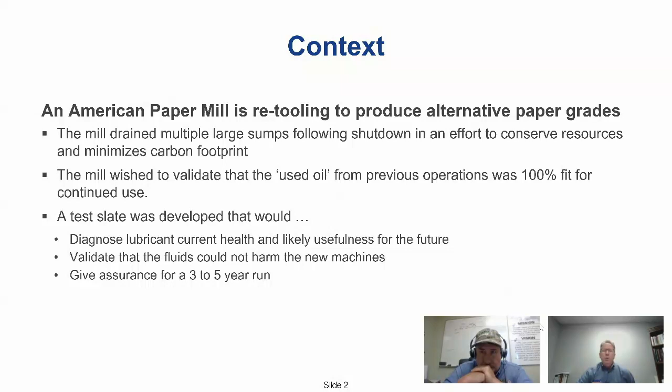With that in mind, we developed a test slate that would give us the means to diagnose the current health and likely future usefulness of the fluid, to validate that the fluids could not cause harm to the machines if they were set in for a 3 to 5 year run, and then to give the customer some assurance that if they do go ahead and start the mill back up with the fluids from the previously operated machinery, they were going to be in good shape.

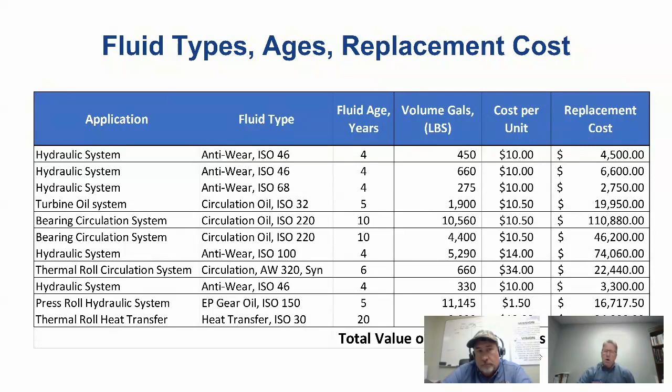So here's a representation of the different classes of fluid. The applications were hydraulic, turbine, circulating systems, and thermal control, and component wear protection. Fluid types are identified here generically. The age of the fluid: in all instances, the oil's gotten some long-term use. So they've gotten their value out of it. The question is, is there more value to be had? You notice in the bottom right, $331,397.50. It's the replacement cost for the fluids if we determine that the fluids are not suitable for future use.

So, step-by-step process here. First, we reviewed the data history of all of the fluids, all the applications, took a look back in the past to see what was going on. And then we constructed a test slate that consisted of the routine tests repeated, since the oil's been sitting still for more than a year, I guess about 18 months, and secondary and tertiary testing to measure for remaining antioxidants and any potential varnish or sludge risk. And then following all the testing, we were to make decisions on replacement requirements.

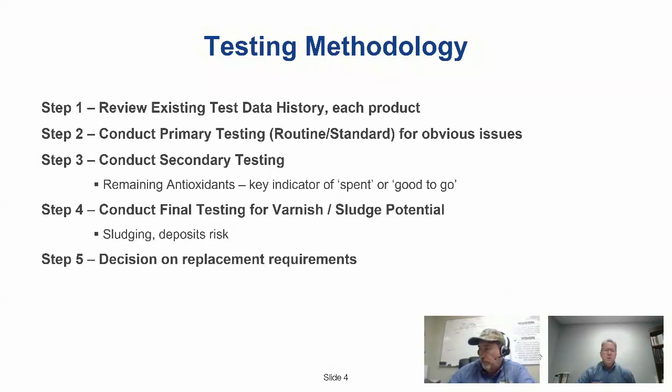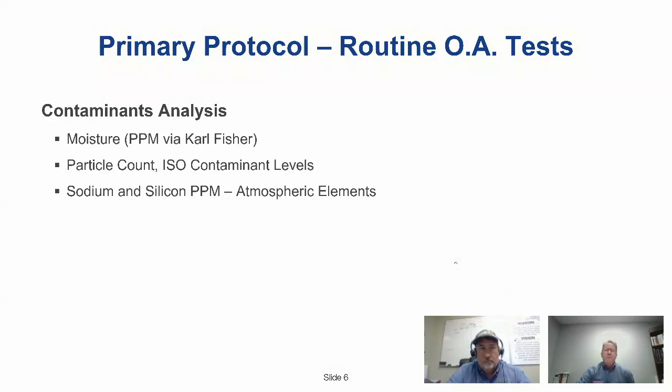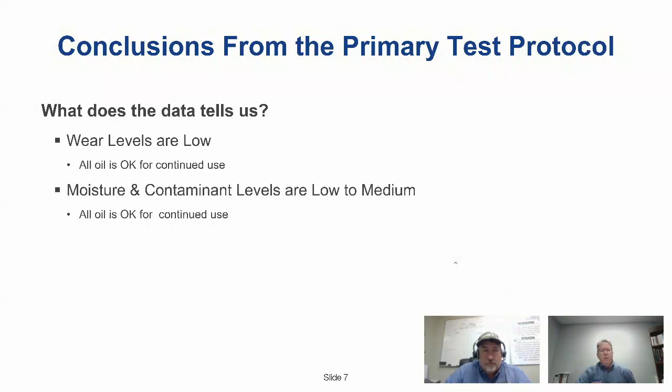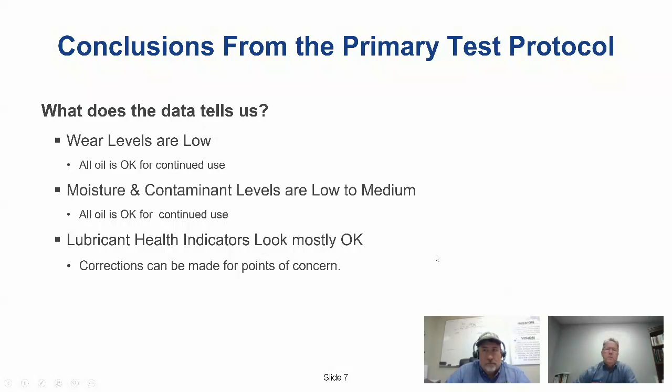From the analysis from this test slate, we saw that the wear levels were low as we expected. Moisture and contaminant levels were low to medium, certainly all rectifiable. Lubricant health indicators suggest that the fluid should be good for continued use with some corrections. So going back to the chart, the display of the products by type, we see the viscosity parameters here where there was some concern that could be rectified. Moisture concentrations all look pretty good and could be improved upon. Particle count concentrations mostly looked good with a few outliers, all of which could be rectified.

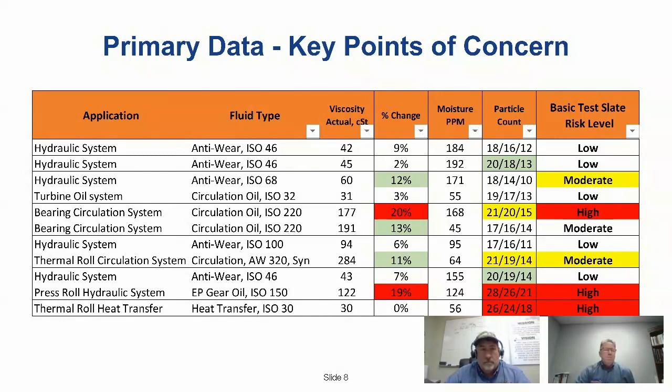From our basic test slate, we could reasonably conclude that all of the oil would be suitable for continued use with a little bit of enhancement, a bleed and feed on these to bring the viscosities back in line, and filtering to prepare to go back into service. Basic test slate says things look pretty good. We could continue to use these fluids. So we want to look a little bit further. We want to know if the oil still has some reasonable longevity left in it.

Lubricant life cycle obviously is greatly influenced by the antioxidant concentrations, which is influenced by the extent of exposure to moisture and heat during routine use. And so we're going to ask the question, has the oil reached the end of its utility? We're going to be looking at additive chemistry evaluations, specifically the antioxidants. We're looking for the presence of amines, phenols, and alkyl phosphates, such as zinc dialkyl dithiophosphate.

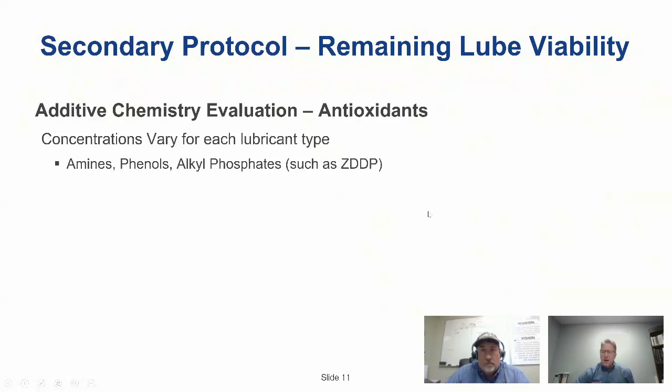All of these additive types are placed into the oil as a matter of the manufacturer's preferences for sales cost and longevity of the fluid. They're philosophical choices, if you will. The concentrations of these additives are easily measured, and the concentration certainly impacts how long the oil is going to last.

We know that antioxidants are used to fend off low-intensity chemical changes, but once the antioxidants are gone, we expect oxidation to ramp up and the oil to begin looking at the end of its life. The key indicator for corrective action here for us will be what's the percentage of antioxidants left.

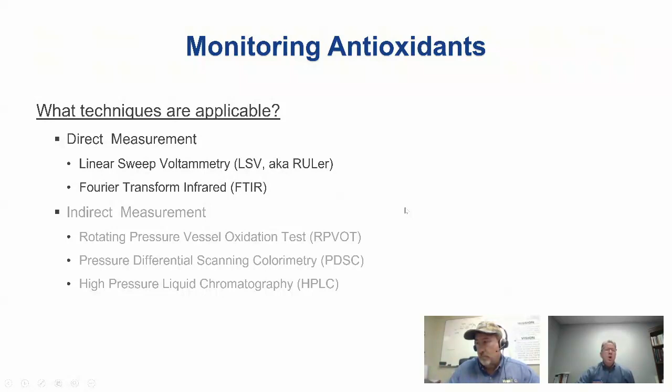Now, there's a couple different ways to go looking at antioxidant concentrations: linear sweep voltammetry, also known as the RULER instrument, and Fourier transform infrared spectroscopy. There are some indirect measures that could be used to measure the effect of remaining antioxidants, but not the concentration of remaining antioxidants. We chose to look for the concentrations. I'm going to let Rich speak for a moment now, talk about the test.

Yeah, sure, Mike. And since this is a conference that is sponsored by the folks from Fluitec, and we've got people like Greg Livingstone in the room, they're going to be very familiar with this kind of graph, which is out of the Fluitec RULER, and it's cyclic or linear sweep voltammetry.

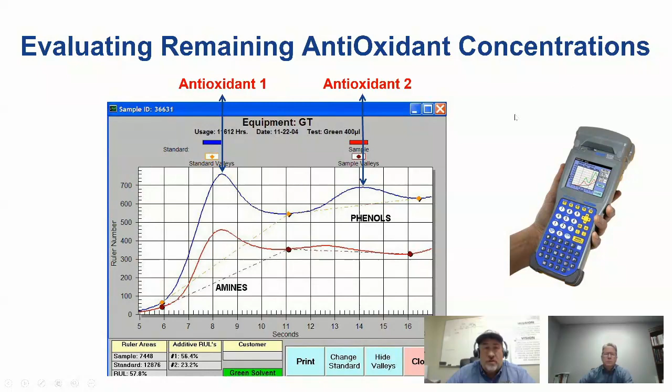You see in the lower part the number of seconds as it sweeps through the voltages, and then the corresponding current flow that you see for each of the antioxidants. In this case, it's highlighting both an amine peak and a phenol peak. And by the amplitude here, you're seeing how much is there. Generally what we're doing is baselining the oil to see what is the starting concentration of those antioxidants, then looking at a sample to see how much has diminished over time.

This slide then shows us how we're using two markers, these yellow dots, to create an area under the curve so we can calculate the amount of antioxidants, in this case the aromatic amine that is focused in on this part of the RULER graph, if you will.

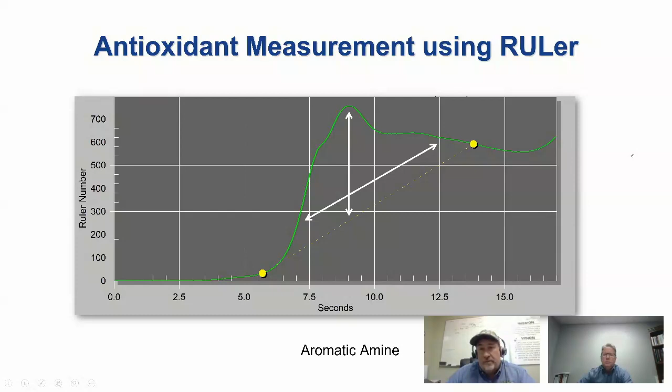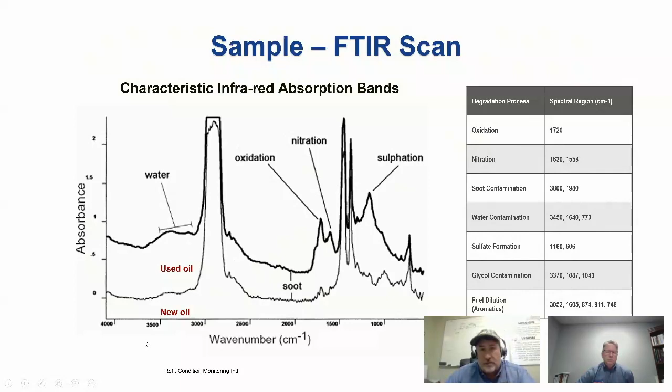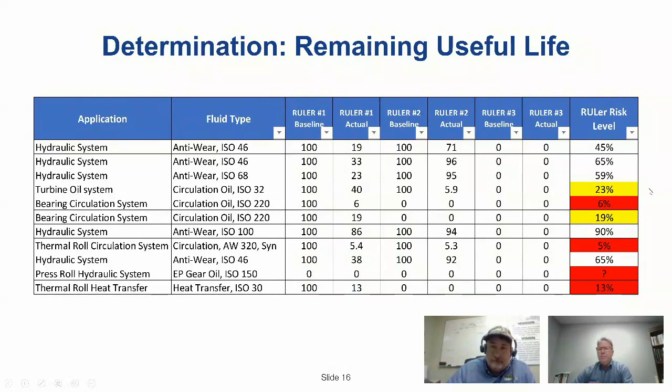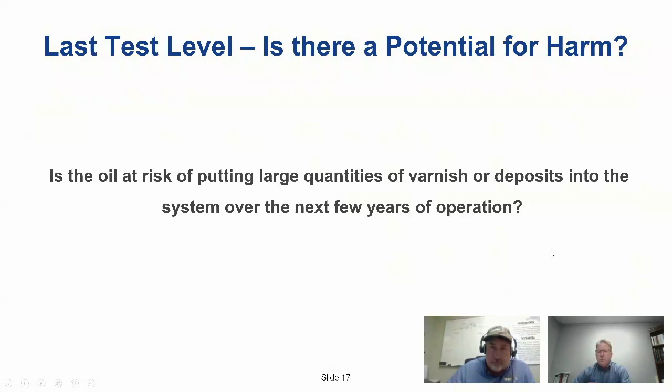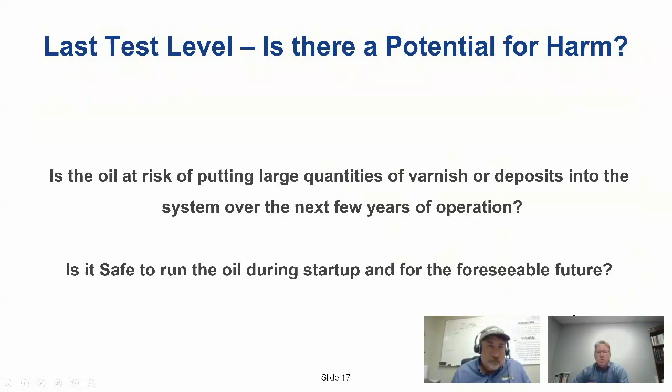Next question is, if we put these fluids into service, is there any potential harm? We know that eventually varnish and deposits will play out as oil chemistry changes. We begin to produce high molecular weight soluble compounds, and we certainly don't want to be piling up garbage inside any of these reservoirs. So the question is, is it safe to continue to use this fluid for the foreseeable future?

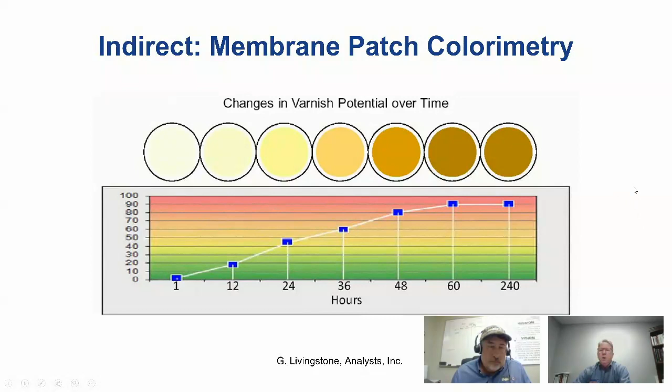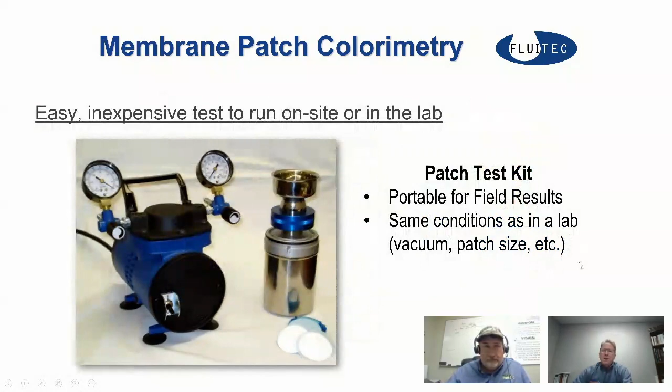And to answer this question, we're going to the membrane patch colorimetry technology that Greg developed many years ago. It is the MPC test kit, where we have the means to produce a patch. And the patch can then be examined for various different color characteristics using the visual spectrometer. And so I'll shut up and let Rich comment upon this for just a second.

Yeah, so the colorimeter here, or the photospectrometer, is going to look at the patch that's been prepared and look at the color indication. So essentially, when you have what we would call color bodies that are produced in this kind of oil degradation mechanism, you're initially producing soluble bodies that become insoluble. And that borderline of soluble to insoluble is where things can go from floating around in the oil and being rather benign to plating out onto surfaces.

And so this test allows us to create conditions that bring out of solution, if you will, some of those color bodies, some that may initially be in solution. So you don't really see the problem. The oil doesn't look ridiculously dark or obviously a problem, but these are subtle things that are going to be a problem because you are filling up the capacity of that oil to hold on to them, which means they're going to start to deposit. They're going to start to plate out. They're going to seek the cool areas of the reservoirs.

And there's been a lot of great presentations over the last 3 days about varnish, the effects of varnish, how it forms, and so forth. But we're just building on that to use this test and peer into the future a little bit to see, is it worth putting this oil back out there, or are we going to be dealing with issues? Those issues aren't always catastrophic failure of the equipment. It could just be the deposition of a lot of varnish, which becomes a maintenance challenge in the future. So knowing that at this point in time, when we're deciding what to do with these fluids, really helps make it an economical decision going forward.

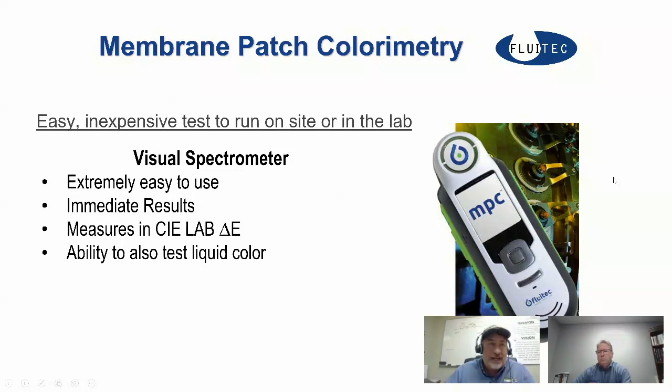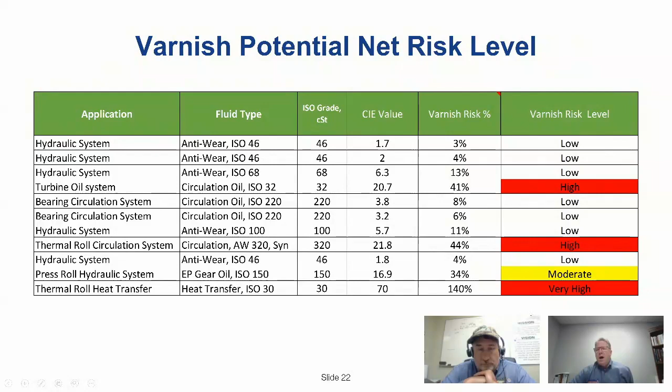We've got some pictures of micro patches that we'll put up here in just a second. But based upon the tests that we did on these various fluids, we see the CIE value noted here, the varnish risk potential noted in the next column, and then a red, green, yellow high risk, low risk characterization. So with this test, we find 4 of these fluids present moderate to high to very high levels of risk for continued use in the system.

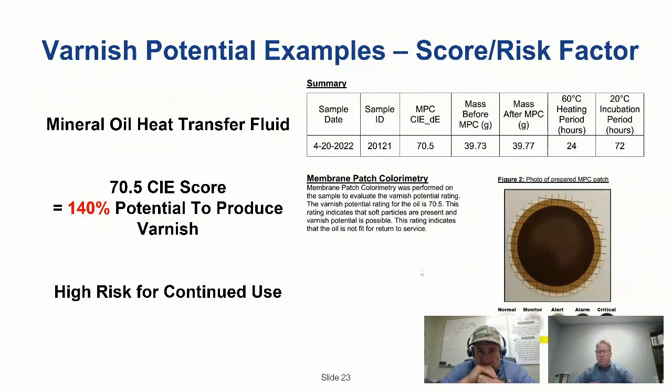Here's an example of the worst one of the batch, a 70.5 CIE score. Calculated 140% potential to produce varnish. The other tests for this same fluid also suggested it would be problematic to continue to use it. So this was a confirmation. A couple others here where we didn't see clear risk from continued use, and then the varnish potential score gives us reasons to stop and pause and think about whether we should proceed forward.

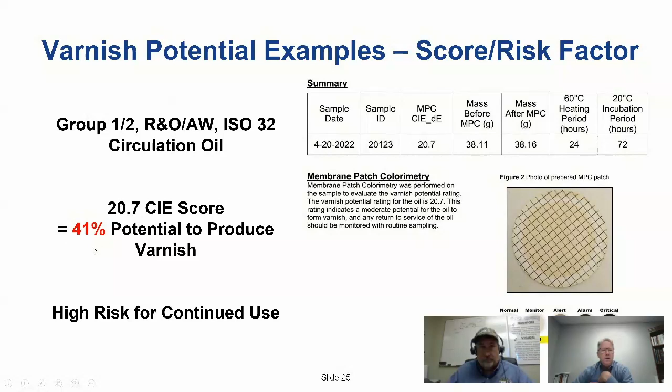This is an ISO 320 synthetic circulating oil that had 6 years' worth of use, still fairly clear appearance to the fluid, but a 44% varnish score. This is an ISO 32 circulating oil. This is actually the oil that came out of the turbine oil system, and it still looked pretty healthy. Visually, it looked pretty good. We had a 41% potential varnish score here.

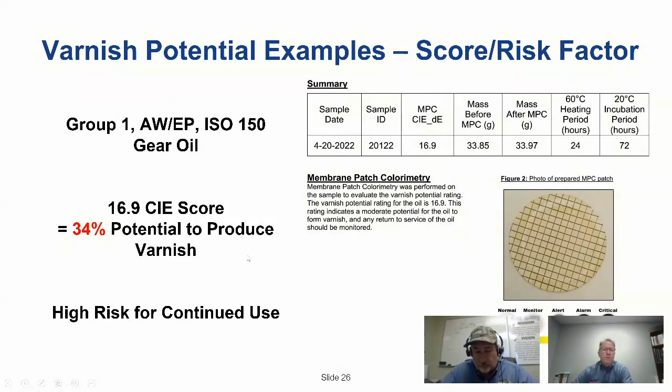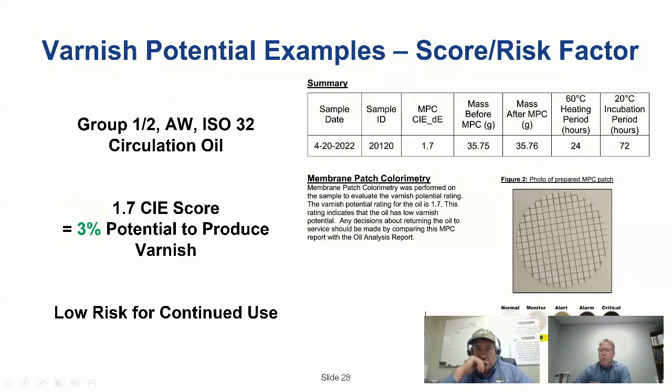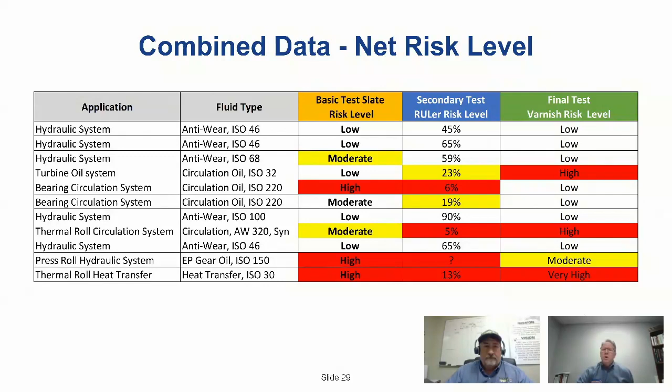So if we line all of the test mechanisms up side by side and review the potential for risk based upon those three different views, if you recall, the basic test slate showed some problems, but all of those problems could be rectified with filtration and additive enhancement. The secondary test, the RULER test, showed us where we had real weakness in some of these fluids or the remaining antioxidant additives that would give us reason to think maybe the oil doesn't have long life left. And then the last test, of course, gives us a look into the potential for those fluids to produce a relatively high concentration of deposits. Collectively, then, three different views to look at the fluids.

The conclusion was that the turbine oil, which looked like it was still in pretty good shape, should not be put back into service for continued use, expecting at least a 3-year run. The AW320 synthetic circulation fluid, EP150 gear oil, and heat transfer fluids also were all condemned and were not to be reused.

And so therefore, if you go back to the original value, replacement value of the fluid, $330,000, and we're looking at the retained value based upon putting a little bit of effort into a more detailed analysis, we still were able to save, the customer is able to save a fair amount of money, begging the question, was this exercise really worthwhile? Cost of analysis, $5,200.

Retained value, including where we're going to drain off a couple thousand gallons and replenish with new healthy fluid to ramp up additive concentrations, $227,000 retained value, payback term. This is kind of cheating. Payback term is 8.3 days, and internal rate of return, 4,271%.

Now, I would be the first to argue we should not be doing this kind of stuff if there's not a reasonable economic value to pursue for our companies. But in this instance, the economic value was superb. I'm going to go back to the previous slide. Think about this turbine oil system here. From all apparent indication, the ISO 32 circulating fluid used in the turbine system, 1,900 gallons, looked like it ought to be perfectly suitable for long-term use.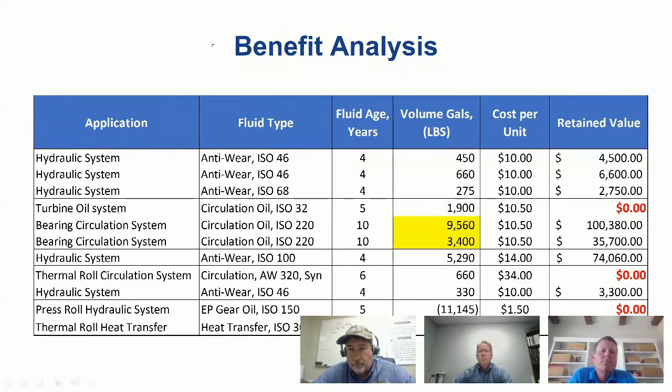I like Greg Livingstone's comment to say we should have charged more for analysis, but you know what? I'm happy with providing value at the level that we're charging. I would just like to see more asset owners recognize that the value is there and engage this more often, rather than just defaulting into the very basic oil analysis and not getting the full benefit. But yeah, let's just do this more. Let's find more opportunities to educate folks so we get more participating in this kind of work.